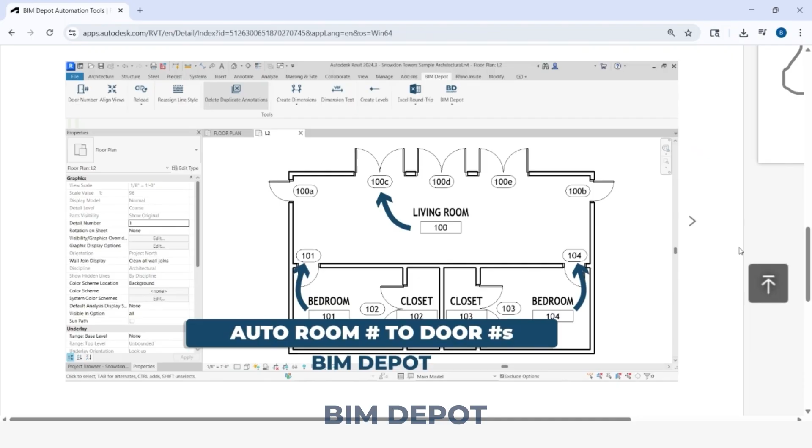You can save hundreds of hours and thousands of dollars using these simple tools. There are so many times within Revit that simple tasks take hours to complete and chew up all of the fee that you have for a project.

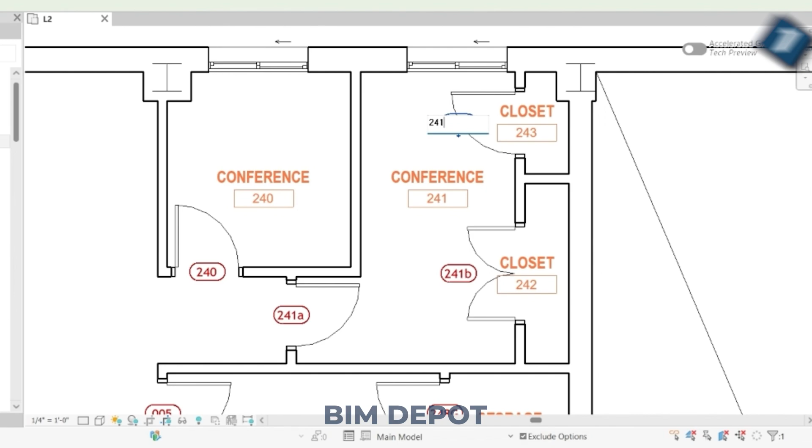Think about how you're renumbering your doors now. You're likely going in, clicking in your tag, and renumbering manually. This is taking your team hours to complete when it could be taking less than a second. The BIM Depot door number tool is the first one within our series.

You can see that it's located all the way to the left of this tab. If we zoom in here, I've highlighted a bunch of these tags. All of our room tags are highlighted in orange, and then all of our door tags are highlighted in red. What this door number tool does, it automatically reassigns the door number to the room number.

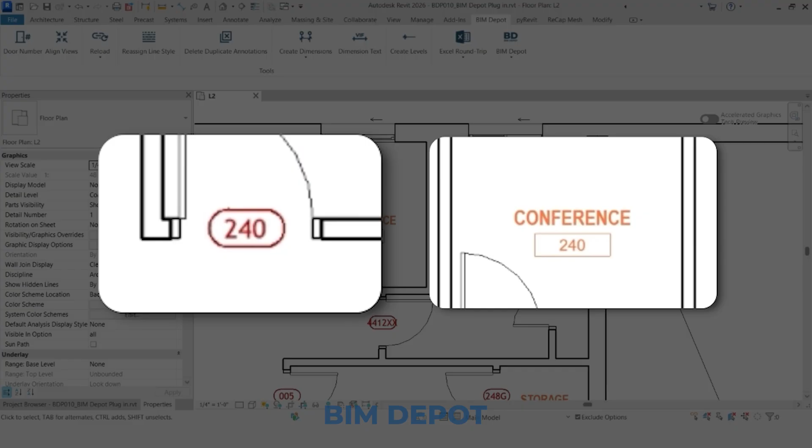This is really common practice within the architectural industry in numbering doors to match the room number. So you'll see right now, which is super common within Revit, is to have these random numbers as it builds in sequence. So if your doors aren't placed in the same exact sequence that your room numbers are placed, it'll generate this random number for it.

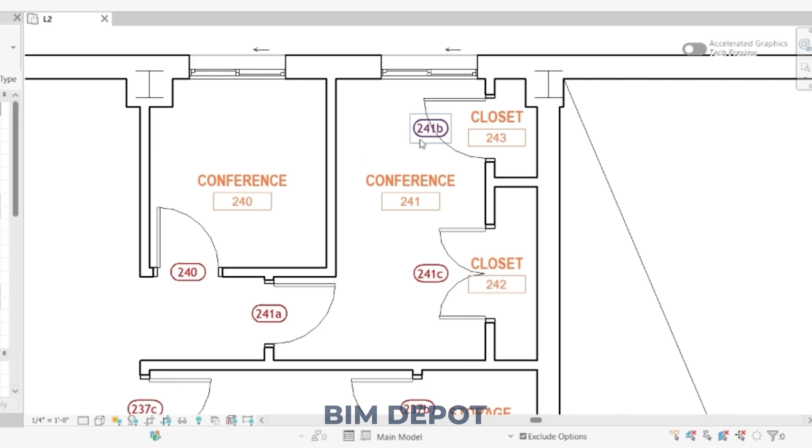If you hover over the door number tool, you'll see a tooltip. And then if we click it, you'll see this pop up saying that the doors have been assigned successfully. Click OK. And now you'll see that the conference room number 240 has a door number 240. And then conference room 241, since there are multiple doors within this room, it automatically adds an alphanumeric suffix to our door number. You can see that this is not only done for the rooms that we were looking at, it's also happening for all of these doors throughout the entire plan.

I cannot stress this enough. This is a massive time saver for your team to successfully document your projects in a time-efficient manner.

So this next tool is a huge hit between architects and engineers alike. It's also a problem that has been plaguing the industry for as long as PDFs have been around. This probably looks familiar to so many of you when you're flipping through a PDF and you're seeing the views jump around on sheets like crazy with no clear organization or way to align things when you're in PDF or sheet mode. Here's where the BIM Depot plugin comes in.

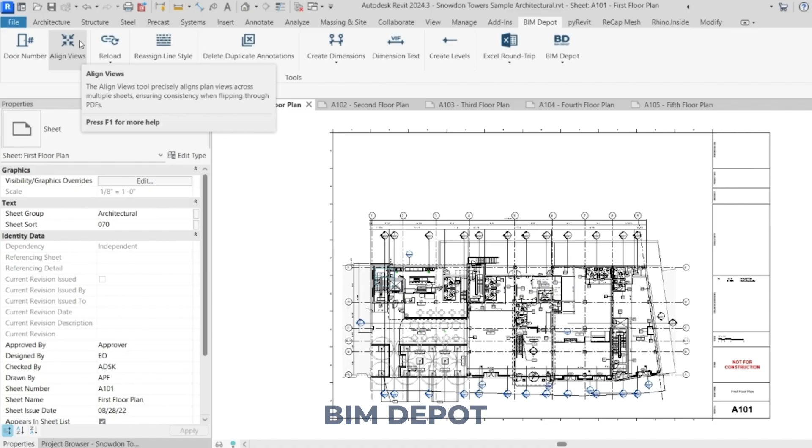The Align Views command saves you hours manually aligning views onto your sheets with a few clicks. Once you hover over the Align Views command, you'll see a tooltip pop up. When we click on the Align Views command, you'll see this dialog box pop up. It'll ask you to select the source sheet.

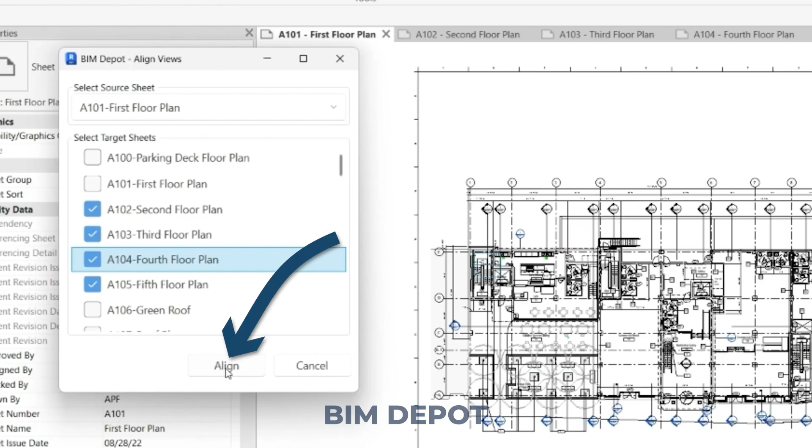That's the sheet you want all other sheets to match, and then select the target sheets. That's the sheets that you want to match the views on. Once you select everything, click Align. And then when we start to cycle through these other sheets, you'll notice that they all match now. Let's show this again, but with a centered plan.

Now that we have all these views aligned on sheets, let's go ahead and print. Now that we're in our PDF viewer, you can see that all of our sheets have views that are aligned across the entire set. And the nice thing for this, we can actually start to trace our different markups, copy them, and then paste them onto other sheets. And you'll notice they're perfectly aligned.

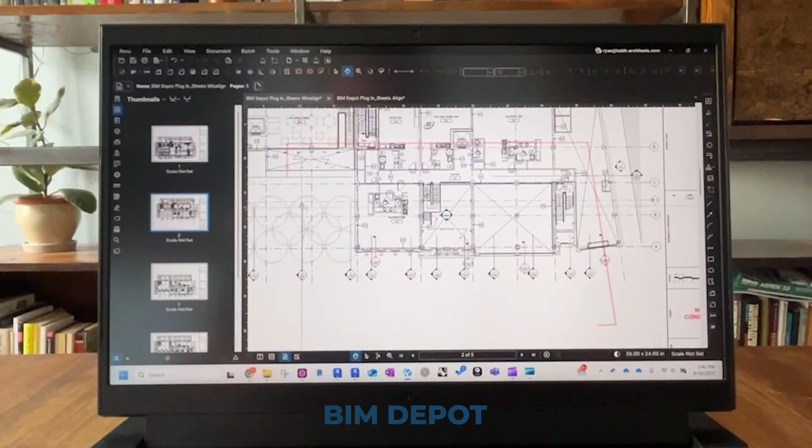So all these markups that we're doing both internally and externally for our consultants, it just becomes very easy to copy different markups across the sets and across different markup PDFs. If we were to try to do this in a misaligned set, you'll notice there's no connection between the markup and the plan. It's really just relative to the PDF. So this tool is incredibly useful for markups both internally and externally.

This next tool is useful for a very specific reason. So you see here, we have a keynote tag. It's saying to align these two walls. Let's say that we wanted to update our keynote file and then have it say align walls. The way that you would get this to reload after you saved, you would go to Annotate, do your drop down for keynote settings, reload, click OK, and then that update is there.

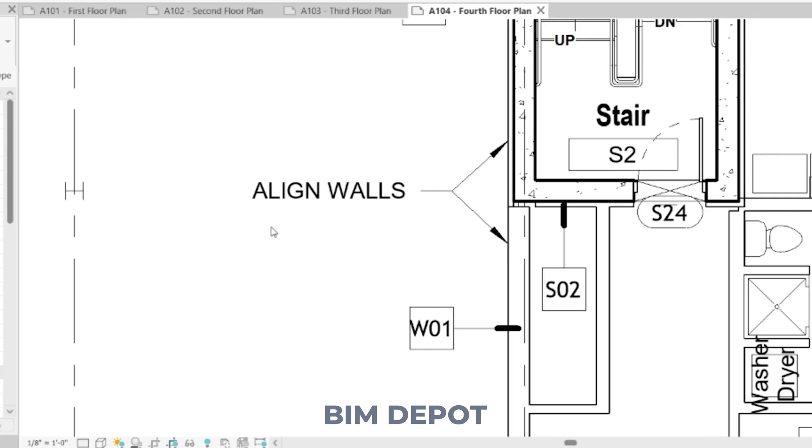There's a much better way to do this with the BIM Depot plugin. Let's undo that. So let's modify our keynote file, save it, and do reload keynotes. You'll get the notifier that it's successfully uploaded, and then you'll see align.

The way I found this to be incredibly useful: go to the View tab, User Interface, Keyboard Shortcuts, type reload in the search bar, and you'll see reload keynotes - this is the BIM Depot tool. Let's add a shortcut, assign it, and click OK.

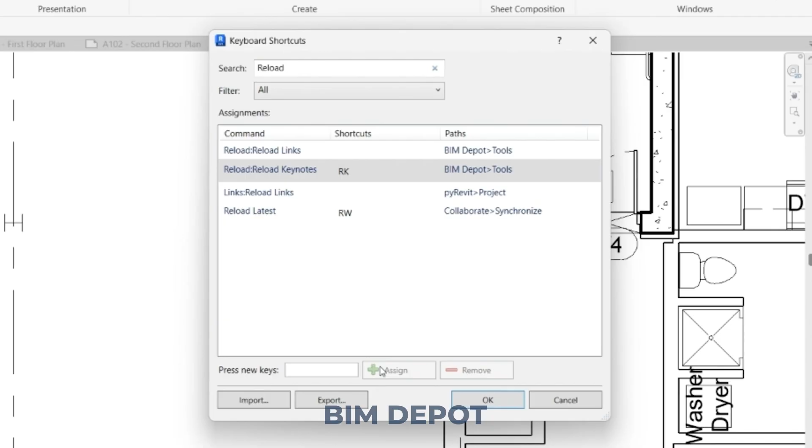Let's update our keynote file again. Hit RK on the keyboard. You'll see that same dialog box pops up, and then our file is uploaded again. Our keynotes are shown correctly.

So the combination of the BIM Depot tool and our hotkeys, we're saving probably about 10 to 15 seconds every time we want to reload a keynote file, which happens very often. And it's also saving you a ton of clicks.

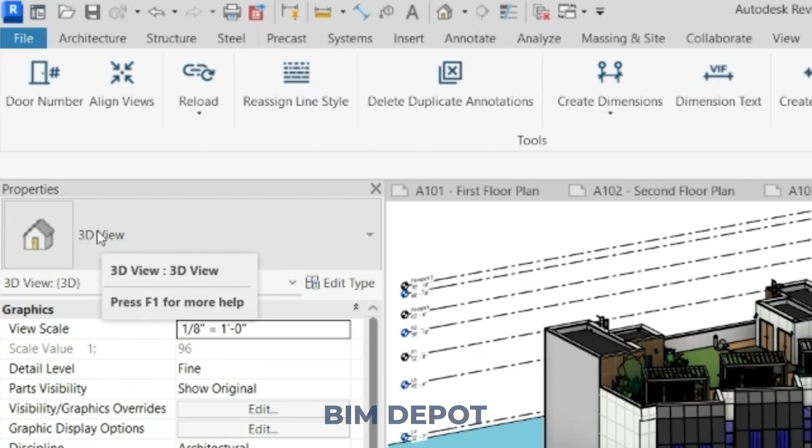The next tool in the BIM Depot plugin catalog is reload links. This one's incredibly simple - it just reloads all the links in your model. This is really helpful for projects that have a ton of different links within them.

So say you get updates from your consultants - maybe 6-7 different consultants on a project. Instead of having to go in here and click reload on all of these, it's really just a time saver, saves you some clicks. Maybe you click it and then go get a coffee.

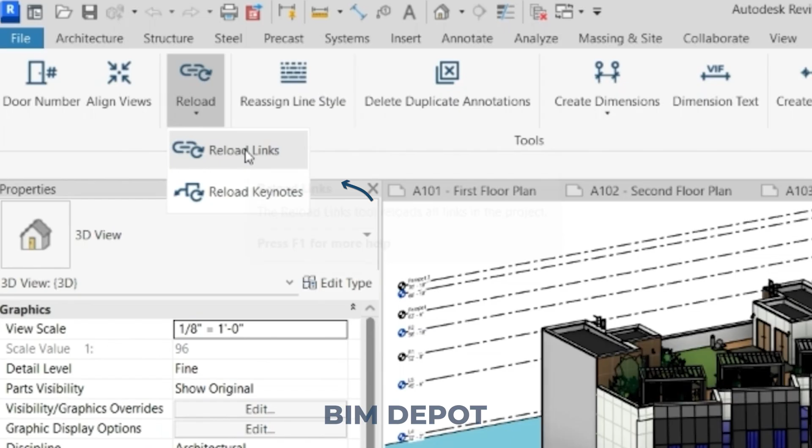This is really just a time saver in that you don't have to be babysitting this thing and having to click reload 6-7 times. And you'll notice that when it's finished, you'll see all Revit links loaded. So that's how you know it was done successfully.

The next tool in the BIM Depot plugin is near and dear to my heart. It really is more of a mental tool than anything - keeps your models clean, and a clean model is good for everyone.

Let's say that we have a series of details. Perhaps you imported these from another project or from a consultant, or maybe you're even converting your old AutoCAD detail library into your Revit detail library. We all know that Revit line styles and AutoCAD layers don't always align, so you'll oftentimes end up with a bunch of line styles that are reading more like AutoCAD layers.

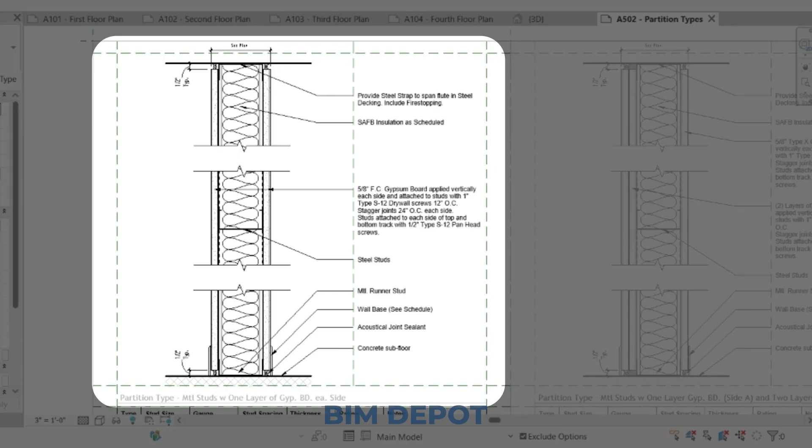So one quick way to convert all of this: go ahead and click on Reassign Line Styles. Let's say we wanted all of these default lines in here to be converted into our BIM Depot standard line styles. Let's go down and select wide lines - I know this line is a wide line currently.

And then let's go ahead and convert that into a number 6. Click OK. And now you've converted all of the wide lines category that's default within Revit into the more specific line style that we like to use.

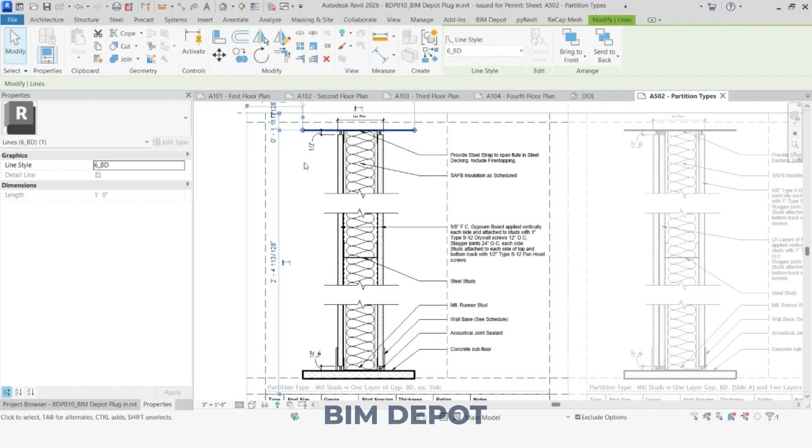The next tool in the arsenal is called Delete Duplicate Annotations. This is very similar to the Overkill command in AutoCAD. This is a bit infrequent when it happens, but sometimes you'll see that you have duplicate lines, duplicate annotations, duplicate detail items, and duplicate text.

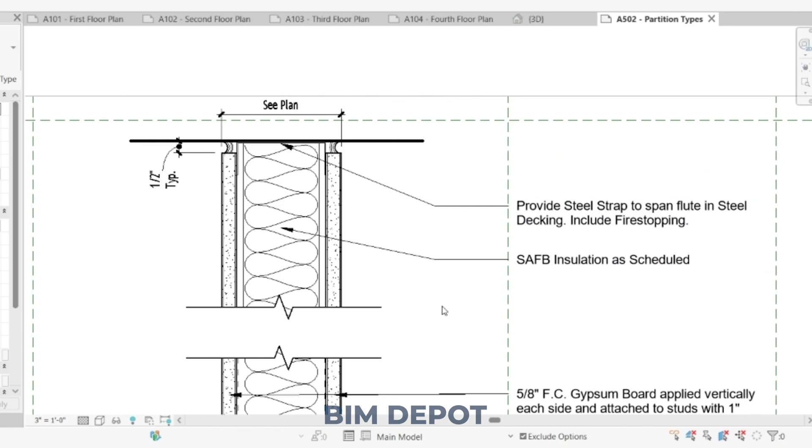This typically happens as an error, and then it can be a real pain to have to go back and clean up - deleting these things one by one. So instead of doing that, you can click Delete Duplicate Annotations. You'll get this dialog box that it was successful.

After we run that command, we can go back and check and notice that all of this is now just singular. We don't have those duplicates anymore.

Our next set of tools in the BIM Depot plugin is to create dimensions. We have 2 versions, for grid dimensions and for level dimensions. So let's go ahead and click Create Grid Dimensions, and you'll see that a bunch of dimensions were actually created.

And now we can see, if we pull these up and get them organized, we can see that we now have a dimension string that goes the entire width of the building, but also then dimensions all of the individual grids. You can see that happen both horizontally and vertically.

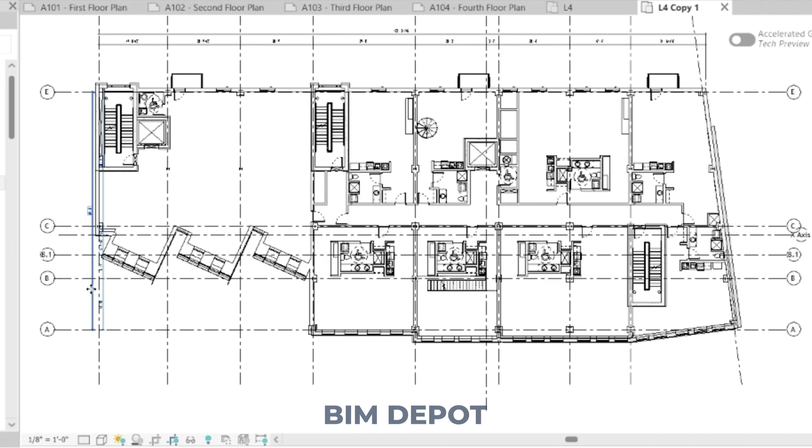This is much faster to click this button and then do a little bit of cleanup than to go through and have to manually click each of these.

This tool pairs incredibly well with the dimension text tool. So if this is an existing building, you can select all of your different grid dimensions, go to your BIM Depot tab, and then click Dimension Text.

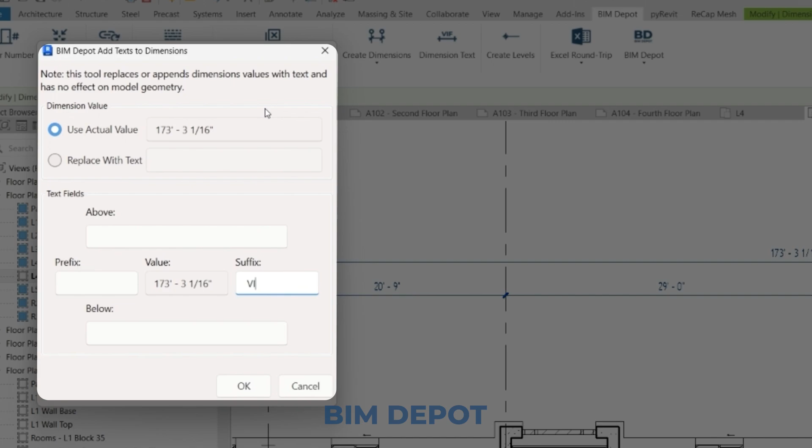You should see this dialog box that pops up that should look very familiar to when you're editing your dimension text. Let's put VIF at the end so the contractor knows that they have to verify in field the different dimensions. And now you'll see that all of our dimension strings have VIF attached at the end.

And it's really just a fast way to do that across the different dimension strings. So if we undo that and then did this the old-fashioned way, you'll notice that you have to do this for every single dimension within the string.

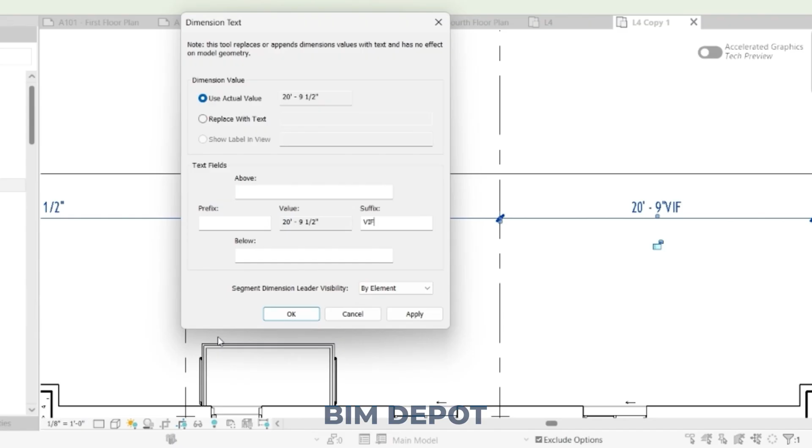And it really just takes up a ton of time to do this, not only for this sheet, but then you have to do this for every single plan that has this. So this is really just an expedited, great workflow tool that saves you hours and hours of time just trying to get your grids dimensioned properly with the correct liability waivers.

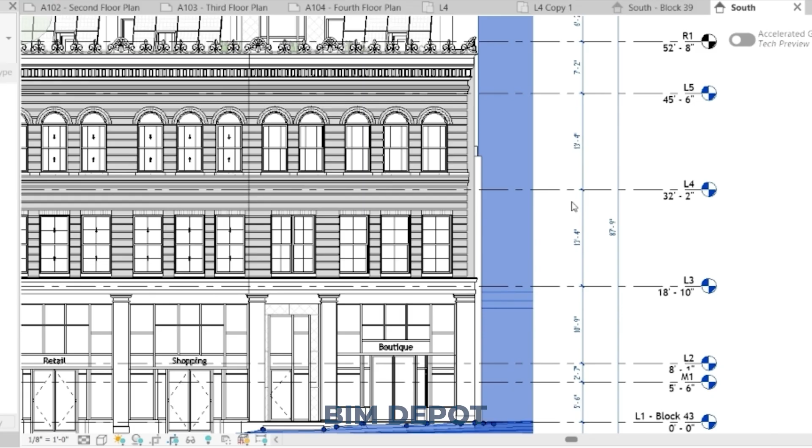Create level dimensions works in a very similar way. If you click on it, you'll see that our dimension string populates here on the left-hand side. We can pull this to wherever we want. It works just like a normal Revit dimension string. And again, we can use this in conjunction with the dimension text tool, and it automates so much of that busy work that we all hate doing but have to do for our construction documents.

The next time-saving tool that we have in the BIM Depot plugin is Create Levels. This is really a multifaceted tool. What it does is creates a bunch of different levels, and it also allows you simultaneously to create floor plans, reflected ceiling plans, and structural plans.

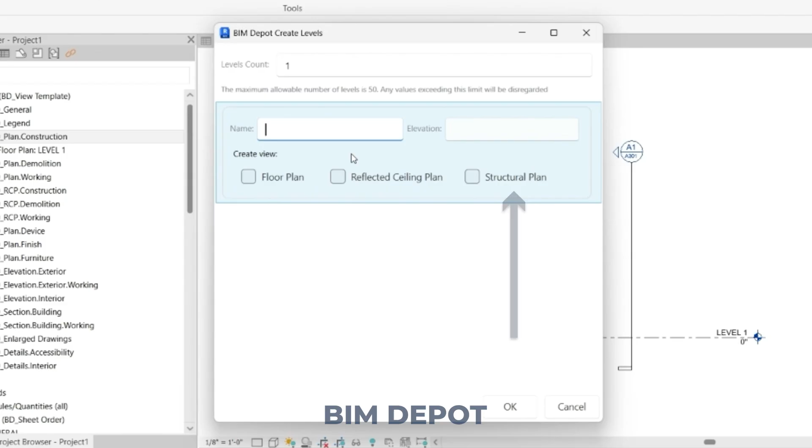So let's go ahead and say that we want to create 5 new plans. You enter the name in, and then you also enter your elevation. And then you can also simultaneously create your different floor plans and RCPs. Once you're done, go ahead and click OK.

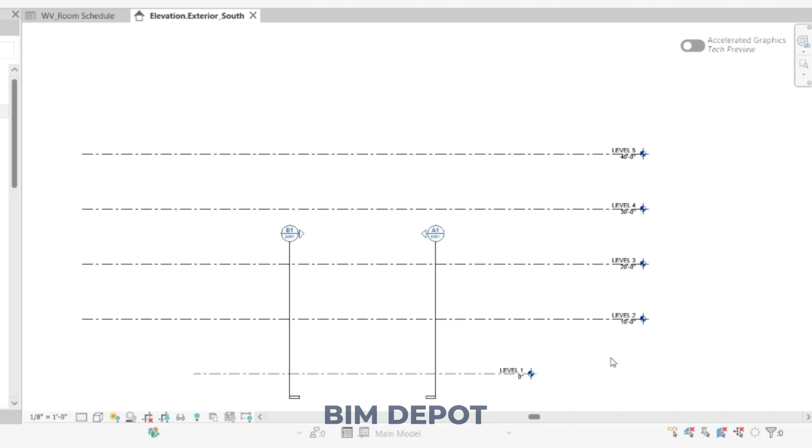Now you'll see that all these different levels are showing up in our elevational view. And if we come to our project browser, you can see that it created a bunch of floor plans, reflected ceiling plans, and structural plans for all the different plans we created within that dialog box. You can then go through and treat this like any other view in Revit, and it gets sorted as such.

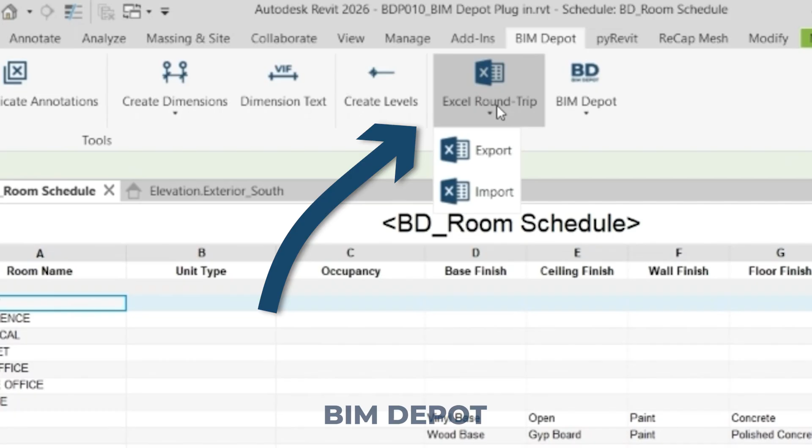The Excel round trip tool allows you to export and then re-import different schedules that you have set up within Revit. So let's go ahead and export the schedule here. Click on the button, then schedules to export.

You'll go and find the correct schedule. Click Export, save it to the location of your preference. You'll have a dialog box that pops up saying it was done successfully. You can then find this within your Windows Explorer, open it with Excel or any other tool that allows importing that file type.

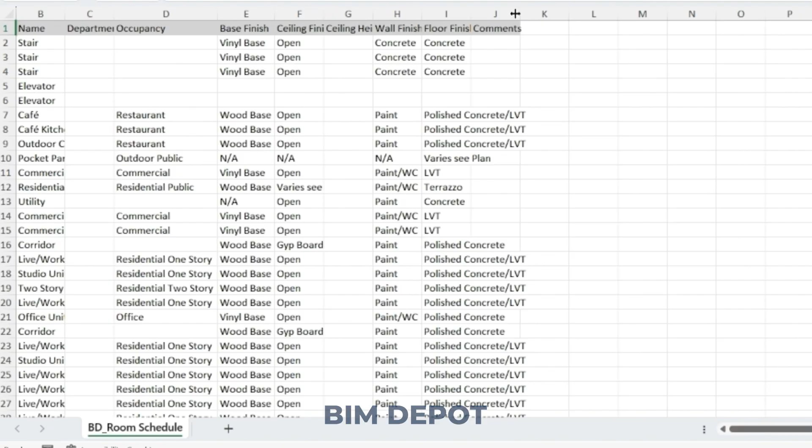Within here, you'll notice that it's really just the same exact thing as a normal Excel file. We can come in here and start to modify all the different cells. This is really great because then we can start to modify the schedule in all the ways that we love to use Excel, and we can avoid all the Revit schedule user interface shortcomings. We can quickly take this into Excel, modify it, and then bring it back.

Once we're done making these modifications, we'll go ahead and click Save, close out, open Revit back up, and then where it says Excel round trip, let's go ahead and click Import, choose that same schedule, Import, and then select that same file that we just modified and saved.

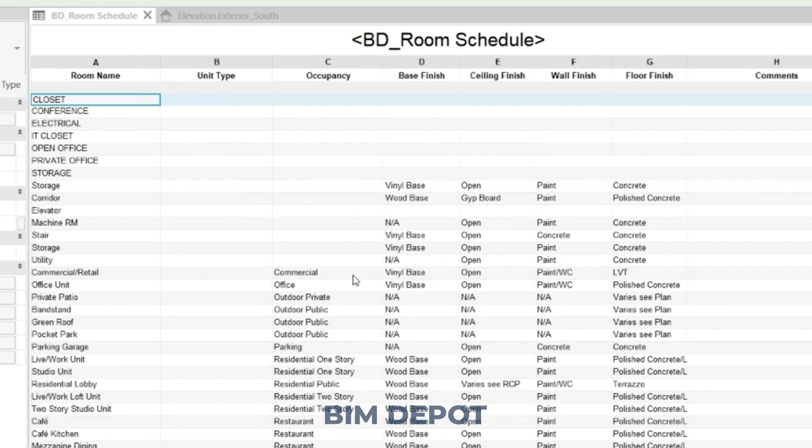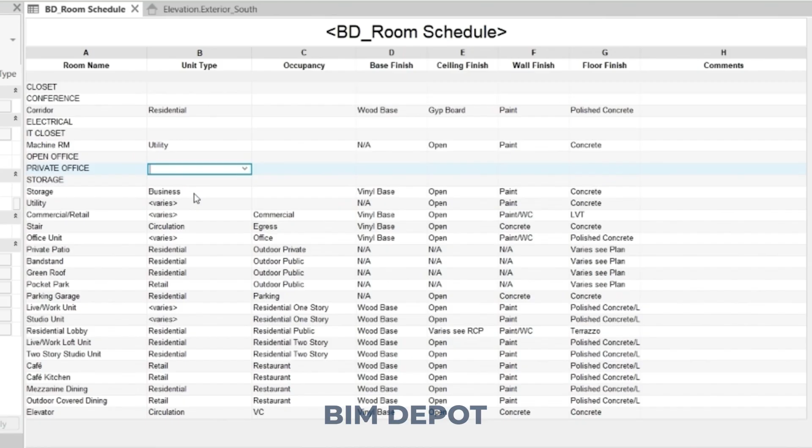Click Open, we'll see this dialog box, and then we'll see now all the modifications that we just made are updated within Revit, acting in the same way you would expect anything else done in Revit, and you can change any of this. This is just a normal native Revit parameter and element, just as it would be if we modified all of this within Revit itself.